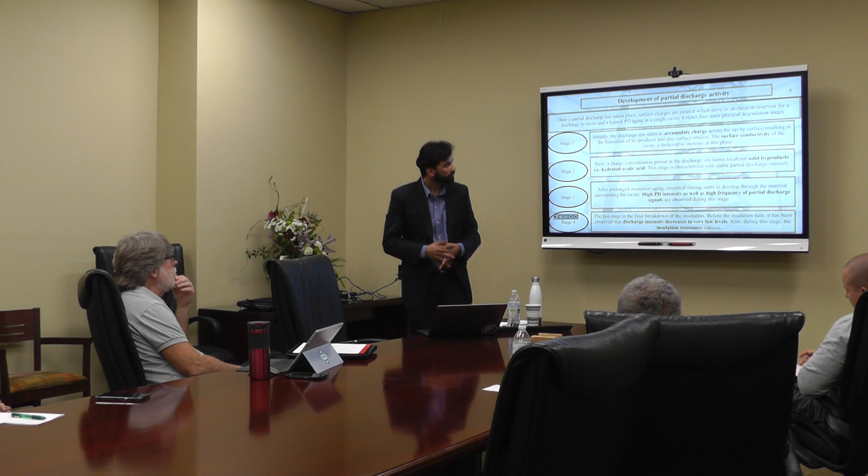During this stage, it has been observed that chemical byproducts are formed due to continuous ionization and ion bombardment. It also results in surface erosion. In addition, it has been observed that the surface conductivity of the whole cavity is increased. That indicates the initiation of the partial discharge activity.

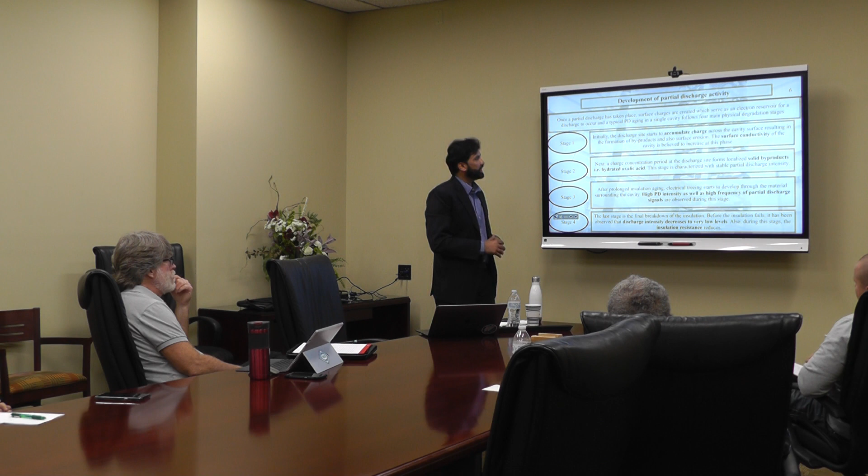The next stage is known as the stabilization period of the partial discharge. During this stage, localized big solid byproducts from the chemical reactions form. As an example, hydrated oxalic acids have been observed. These oxalic acids hinder the flow of charges, and that stabilizes the partial discharge activity. This phenomenon is more predominant in the case of polymeric insulations.

The last stage, which is always the point of interest for researchers, is the final breakdown of the insulation. It has been reported in literature many times that before the insulation fails, the discharge intensity decreases to very, very low levels. Also during this stage, it has been observed that the overall insulation resistance of the cable I am investigating also reduces.

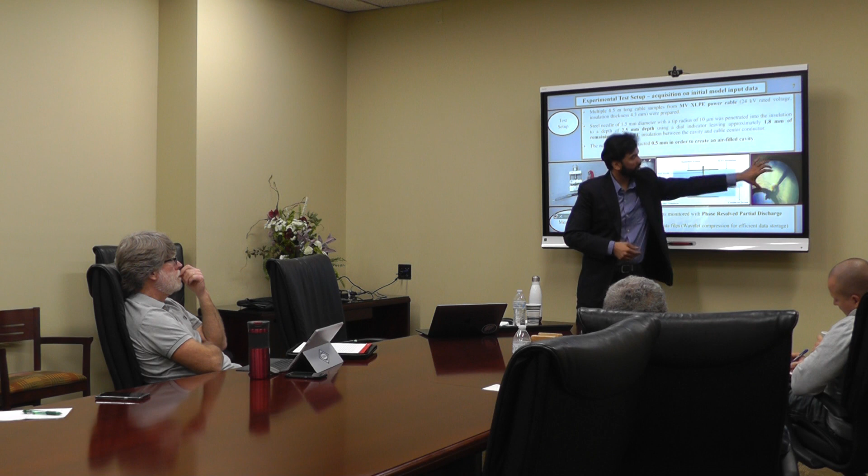This white portion, if you can see, represents the air-filled cavity where the progression of the partial discharge activity happens. I was fortunate enough to observe the progression of the partial discharge happening inside the void. Here is the illustration after the breakdown of the cable sample. I cut it into thin slices of XLPE and observed how the electrical tree phenomenon, represented as stage 3, progressed, which results in the complete breakdown.

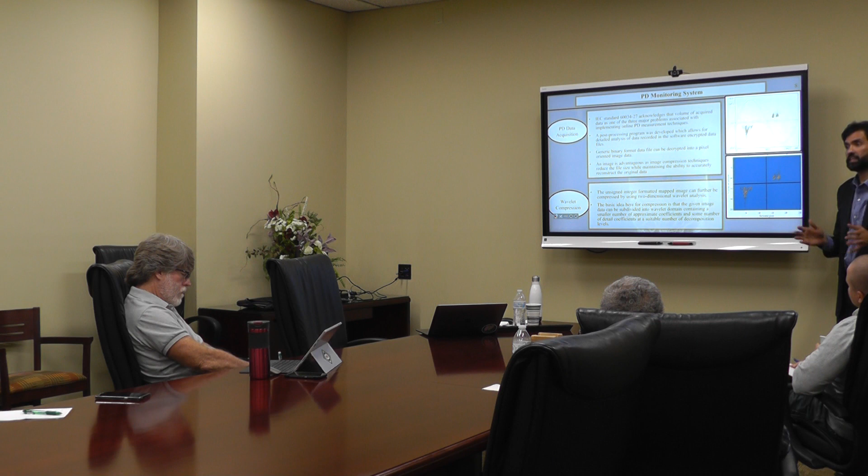Talking about the measurements, I used the technique called phase-resolved partial discharge analysis, which is a very common technique in the field of partial discharge monitoring. Here's a better illustration representing the PRPDA pattern. This is how a commercial PD software or system captures the PD quantities with respect to the AC phase over some definite acquisition period. This example is for 60 seconds of acquired data. Each single dot represents an individual partial discharge quantity.

One of the problems associated with the PRPDA patterns, which actually was acknowledged in the IEC standard 60034, is that the volume of the acquired data is one of the 3 major problems associated with the implementation of online PD measurement techniques. So I came up with a solution on how you can compress the actual data into a smaller file size.

So what I did, I used the generic binary data stored by the commercial PD software and converted it into a pixel-oriented image file. So each pixel represents the intensity of the partial discharge activity happening in that particular pixel. So this figure actually represents the same data, but in the pixel-oriented image data. What's the advantage of using that image? Simple, I can use image compression techniques to store the same data with a reduced file size while maintaining the ability to accurately reconstruct the original data as well.

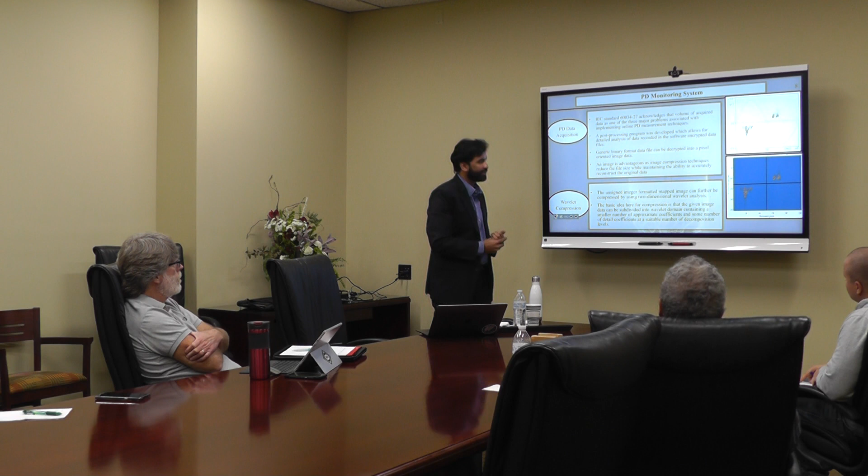Very briefly, I use the wavelet compression technique. It has been used in other branches of science as well. So wavelet compression simply compresses the actual image data by using this technique. Let me illustrate how I achieved the PD data compression. So the same image data, once I decrypted the data, applied the wavelet transformation, the wavelet transformation actually decomposes the original image data into a smaller number of detail coefficients and the approximate coefficients. Those coefficients then can be thresholded and quantized. So the process of thresholding and quantization actually reduces the number of bits required to store the original data.

Finally, just to make it more compressed, I used the deflate compression and the Huffman coding to convert the image data into a single variable. And this is a 100% true compression technique, so you can reproduce the exact image data again. So you can actually make the data storage just based on this technique. So now the question is, if we have to reconstruct the original data, what can we do? Very simple, you can perform all the inverse techniques, for instance, the uncoding, the unquantization, and the inverse of the wavelet transform. Simply, you will produce the original data.

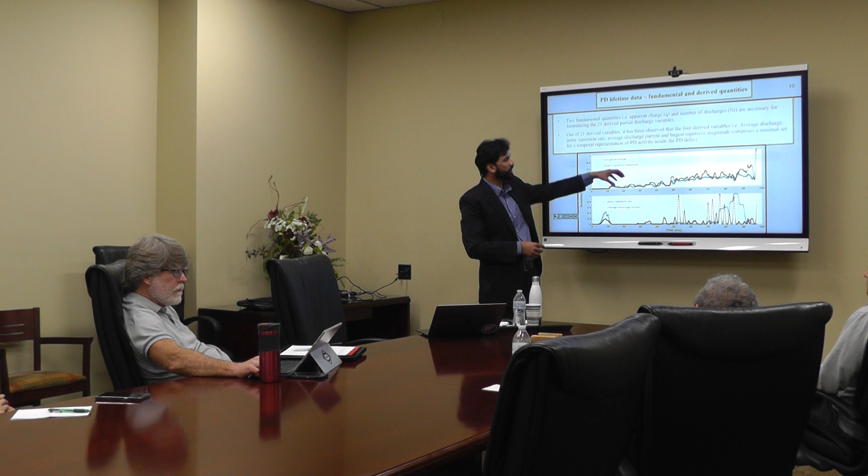Coming to the lifetime partial discharge data. So this is an example from one of my cable samples which I used. So we used accelerated aging. So this cable from start till the breakdown took 96 hours to form the lifetime data. The same four variables which I defined before have been represented. One problem is how we can actually see the codependency among these 4 dependent variables. So in order to answer this question, we go to the data feature or data extraction techniques.

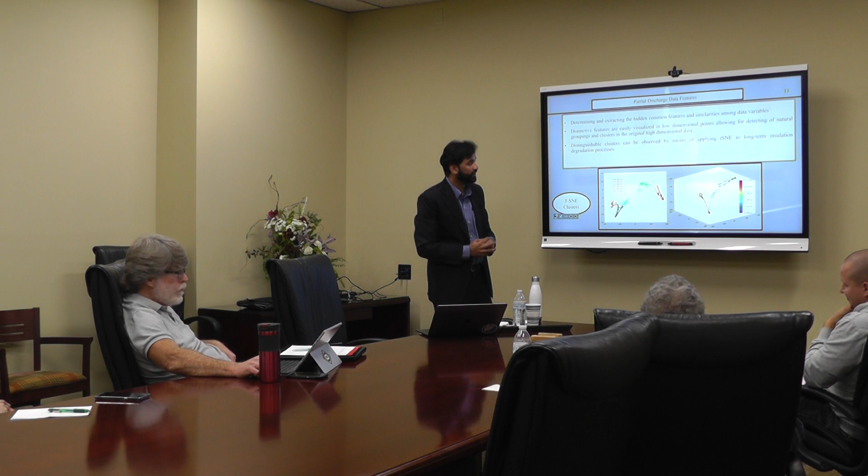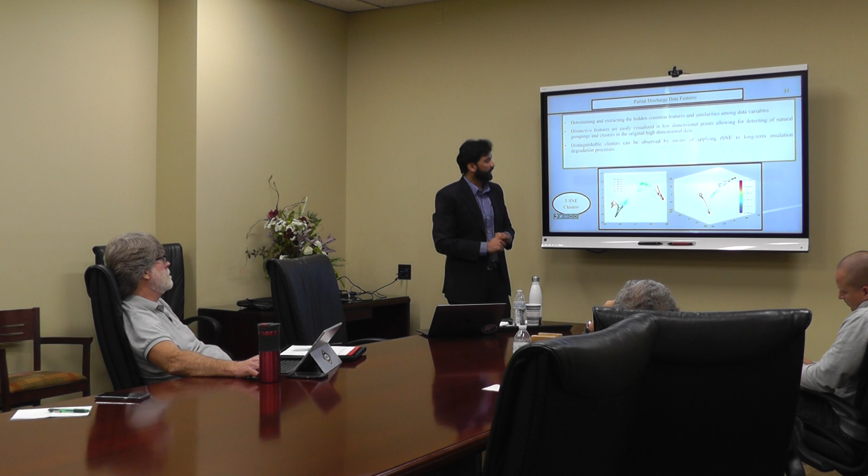One of the techniques, very common, very useful, is known as t-SNE, t-distributed stochastic neighbor embedding. Utilizing this technique actually allows us to find those hidden common features or the hidden similarities among those 4 PD data variables from the last slide. These distinguishable clusters, as you can see from this data plot, in the 2-dimensional scale and the 3-dimensional scale, indicate that there is a distinguishable PD behavior happening over the insulation degradation period. What's the advantage of these distinguishable clusters? One idea is to use those data clusters for the purpose of partial discharge modeling.

So the first point is the time-dependent clusters extracted from the data set of the multiple PD data variables and the observations can establish a definite set of rules and classifiers for a finite set of distinguishable classes. Defining those distinguishable classes actually came from the t-SNE algorithm. So the algorithm actually will suggest how many clusters are required or how many levels of discretization are required in order to obtain these definite distinguishable classes. Another idea behind applying partial discharge modeling is to set up a multi-experimental learning algorithm which actually modifies and corrects its output response based on the newer set of observations. So the more data you have, the more accurate your learning algorithm will be.

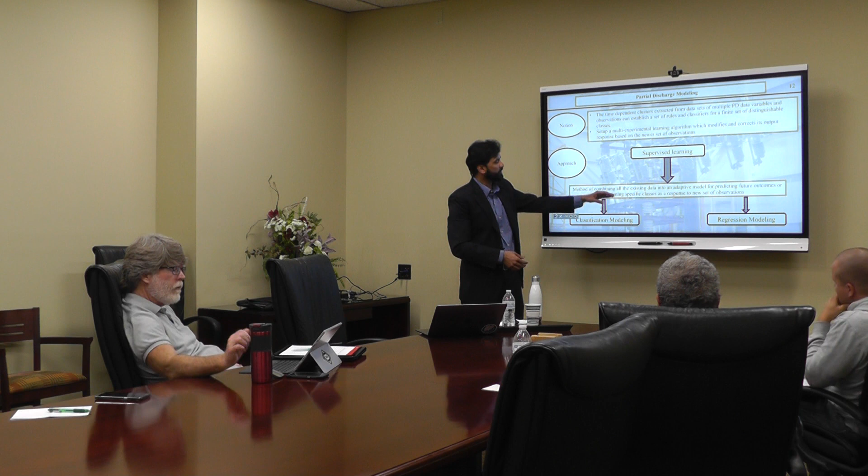A very useful technique in the field of machine learning is supervised learning. So supervised learning is a method of combining all the existing data into an adaptive model for predicting the future outcomes, which represents the regression modeling technique, or assigning specific classes as a response to a newer set of observations. And this particular one represents the classification modeling technique. So both these categories can actually be merged together to perform the supervised learning algorithm.

Talking about the classification modeling or the regression modeling in general. So what are the procedures for performing the classification modeling? Classification actually requires the classifiers to assign each new observation to a specific class extracted from a finite set of classes, as I mentioned before.

Coming to the response of the classification model, the same data which I showed in the previous slides has been represented with 8 distinguishable classes, depending on the interdependence or codependence of all those 4 data variables. How can we judge how accurate the response of the model is? For this, we have to

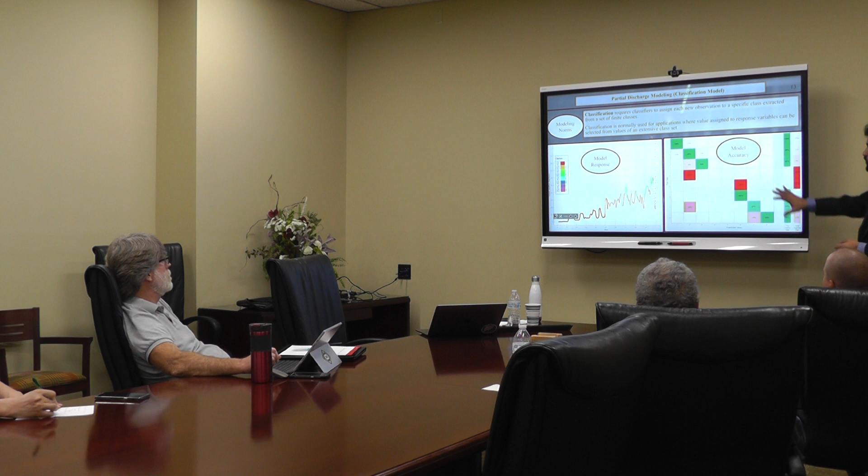find the confusion matrix. The confusion matrix just compares the true class, which is based on the actual data, and the predicted class. As we can see, class numbers 4 and 5 represent a 100% false rate, or false negative rate. That suggests the model fails to assign the class to 100% of the observations which need to lie in these 2 classes.

Similarly, for class number 7, as you can see, 33% of the observations were falsely classified. Similarly, for the last class, 17% of the data observations were inaccurate. So what's the solution? How can we improve the accuracy of the classification of the regression model? One approach which I have used is known as the multi-level time series approach.

So what I did, I divided the whole lifetime data into 3 subdivisions. Why did I do that step? Because these 3 subdivisions are in accordance with the partial discharge mechanisms which I presented earlier. For instance, the first 50% of the degradation time can be classified into one model, and then from 50 to 90% of the degradation time can be represented in a second model, which illustrates the stage

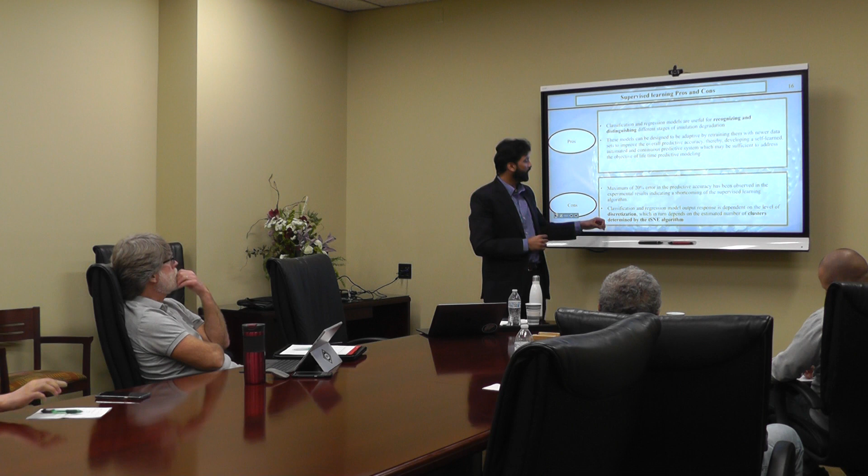The cons, as we see before, a maximum of 20% error has been observed in the other cable samples, which actually indicates the shortcoming of the supervised learning algorithm. Another fact, which in my opinion is the con of this technique, is the dependency of the level of discretization. So the t-SNE algorithm actually dictates how many classes you have to formulate. So one way is you can increase the sensitivity and increase the number of the classes, which will produce very accurate results, but it will not be distinguishable. It will be the same as the actual high-dimensional data.

For my analysis, I used another alternative, multivariate time series analysis. These kinds of analysis have been used for a long time in the field of econometrics, in the field of power system analysis. So I use the same approach for giving the same output response, that is the future prediction, by using this multivariate time series analysis. This technique is independent of the discretization and is independent of the classification. The advantage is that it actually understands the dynamics of the system which is represented by numerous response variables. So it understands how the behavior is actually changing with respect to the time.

Very briefly about the principle. So you have to find a linear combination of those multivariate time series. These linear combinations actually convert each component series into a level of stationarity. Once you obtain this level of stationarity, then you can use the co-integrating relationships, and the coefficients defining those relationships, known as the co-integrating vectors, can be used for the predictive diagnostics. One big con of using this multivariate time series is the unattainability of formulating a multi-experimental learning algorithm, which I suggested before for the supervised learning. So you cannot retrain this multivariate time series with a new set of observations. So it will predict individually for each given sample.

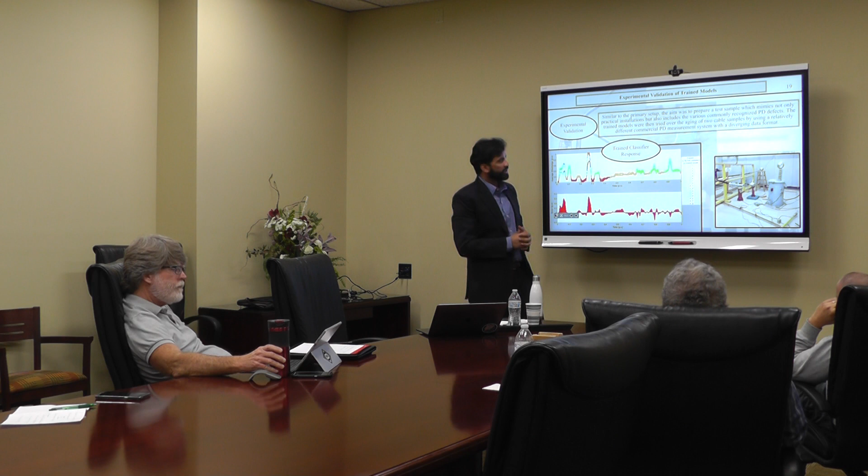Okay, I mentioned at the start of my presentation that we performed another test setup in order to validate all those trained algorithms. So in this case, we tried to observe how these models will behave if we apply a comparatively different type of scenario. So we used a cable sample which was stressed with the lightning impulse voltages and the AC flashover voltages. This cable sample was stressed on the termination end, and I stressed it afterwards with the same configuration, which is the needle plane configuration. So the termination was pre-stressed, and with the artificial aging, I used the steel needle plane configuration as well.

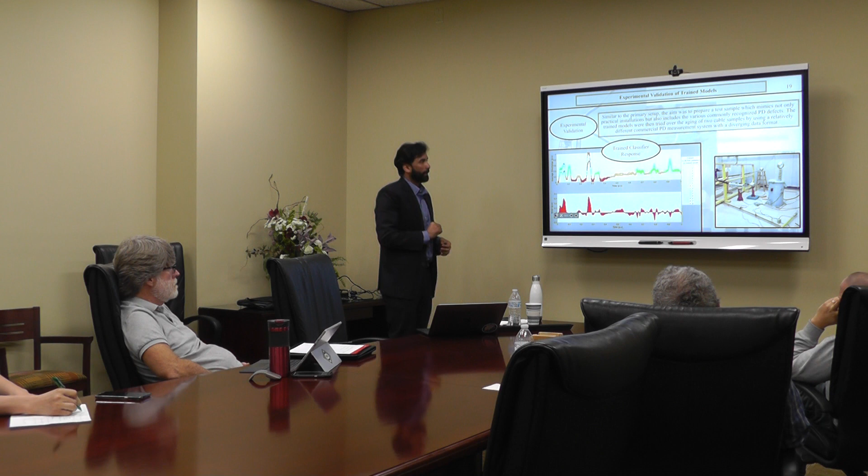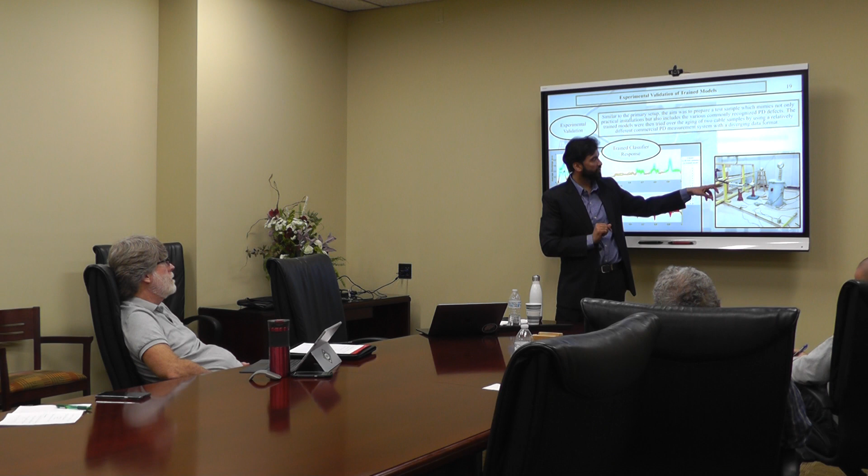In this configuration, I also observed multiple PD defects. Before, it was only the internal discharge of the void. Here, we observed the surface discharge happening across this open end, and also a little bit of corona, which I was able to suppress completely by using the terminating material. Anyhow, coming back to the response of the trained classifier, the response showed 36% inaccuracy between the predicted and the actual response. The advantage is that the model successfully classifies each observation.

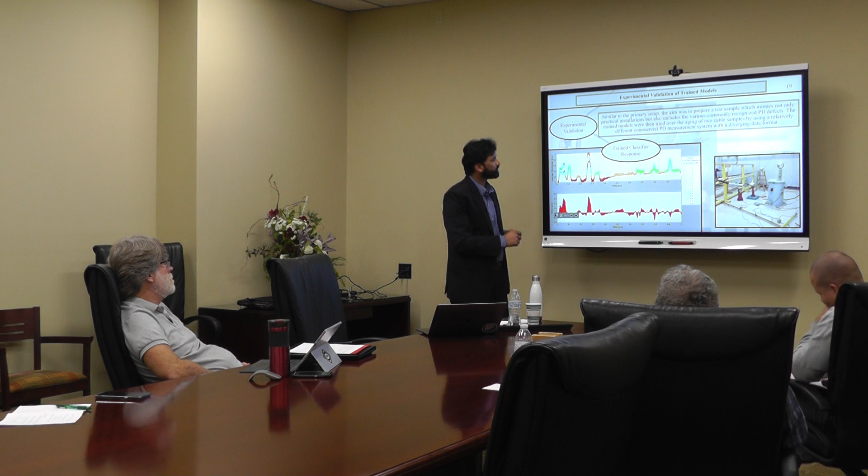Sorry, my bad. So the classification accurately classifies each data observation. So the accuracy was as high as 100%, but for the regression part, the error between the predicted and the true response was as high as 36%, which tells that this model, or the trained model, requires more historical data or requires more learning in future.

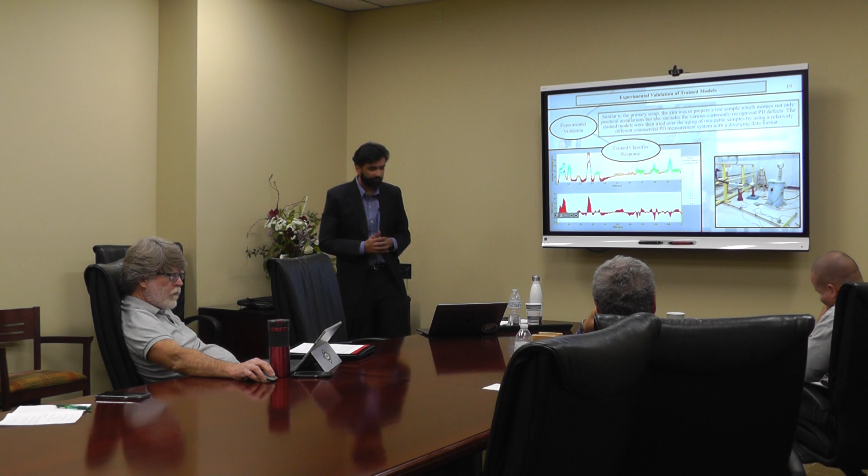Similar observations were made for the VEC model. However, as you can see here, the actual response lies within those percentiles, as well as it was close to the mean of those percentiles as well, which actually suggests that in order to have very accurate predictive response, the VEC model represents a better scenario.

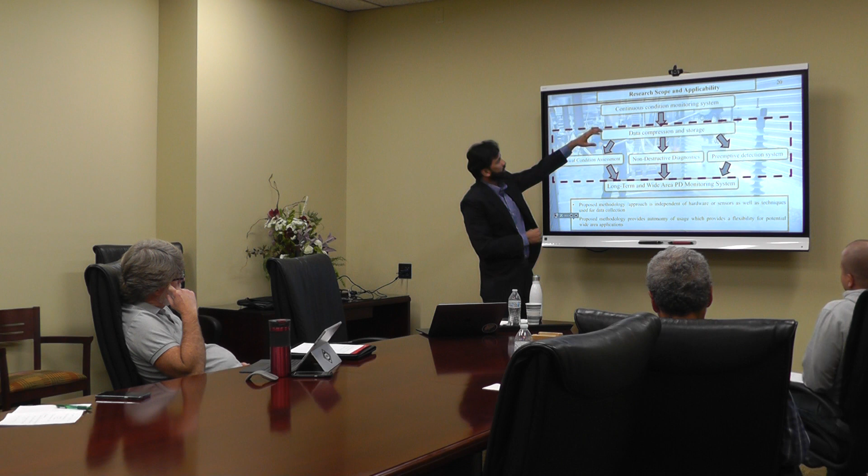Okay, that was all related to what I did in my research and the research methodology. Now let's discuss what is the scope of this research work, where it can be applied. Recently it has been stated that the continuous condition monitoring system has gained significant importance over a traditional periodic-based monitoring system. Irrespective of what kind of sensors or measuring equipment they are using for the condition monitoring system, my research lies within this red area.

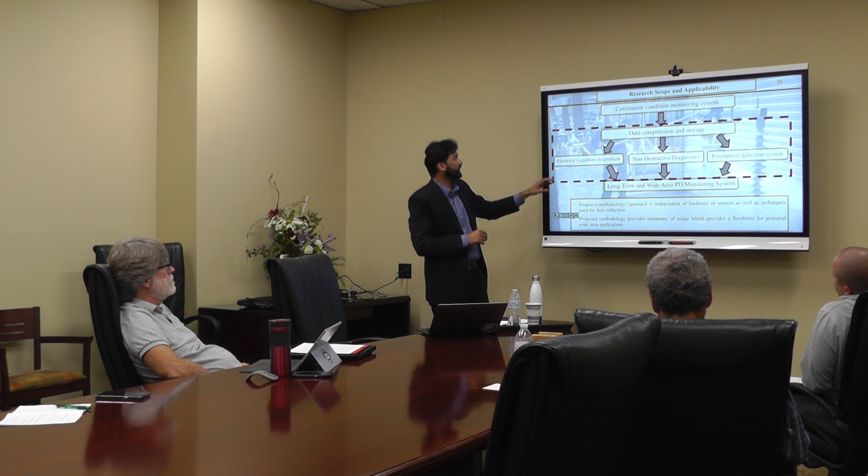First it started with the data compression and the storage technique, which I proposed. Using that compressed and stored PD data, you can use it for the electrical condition assessment in general. You can perform non-destructive diagnostics. You don't have to perform any kind of destruction on the cables, on the sample in general. Very importantly, the last step is the preemptive detection system, which, by using the trained model technique, allows you to set decisive rules, like a decision-making rule, which will allow for preemptive detection.

At the end, where it can be applied. It can be applied for long-term and wide area PD monitoring systems, which is one of the biggest key points in the future smart grid systems.

Talking about the contributions, here's a brief summary of what I did in my dissertation document. First of all, the software-dependent raw PD data was decrypted and exploited by a custom-designed algorithm for formulating different numerical lifetime PD models, as well as for efficient PD data preservation. A heuristic approach resulted in the selection of the minimum PD data variables, which accurately represent the temporal behavior of PD activity.

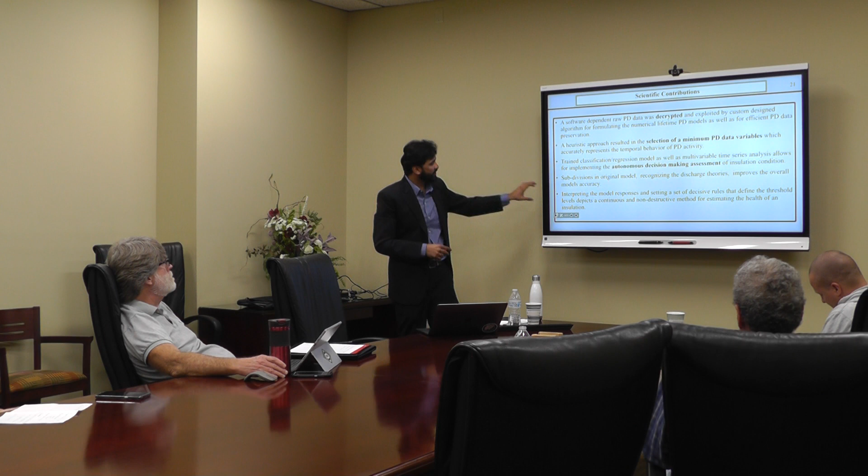As I mentioned earlier, autonomous decision-making assessment can be performed on the insulation condition by using the trained classification and regression analysis. Another big point in my dissertation is that the subdivisions in the original model, which are recognized through the discharge theories, improve the overall model's accuracy. The last point is a key point, where the interpretation of the model responses and setting a set of decisive rules defines the threshold levels, which depicts a continuous and non-destructive method for estimating the health of insulation.

Talking about the future works, I still believe there is a lot to be done in the field of partial discharge monitoring. A lot of investigation has to be done. There is still scope to investigate various scenarios to study the degradation of the polymeric insulation, which will eventually confirm the uniqueness or the universal applicability of the lifetime trends I suggested in my dissertation. The same modeling techniques could be studied for varying insulation materials in the equipment. I used it only for the cable samples, but the same technique can be applied for transformers, switchgear or other kinds of equipment in general.

This point in bold, which I'm in talks with other research colleagues about, and which needs to be performed on a larger scale, is that the laboratory approach should be extended to obtain online data from on-site equipment, which will include the background interferences and the noise, as well as the vast amount of continuous historical PD data. Of course, the majority of that data will be uneventful because partial discharge activity takes a long time to develop.

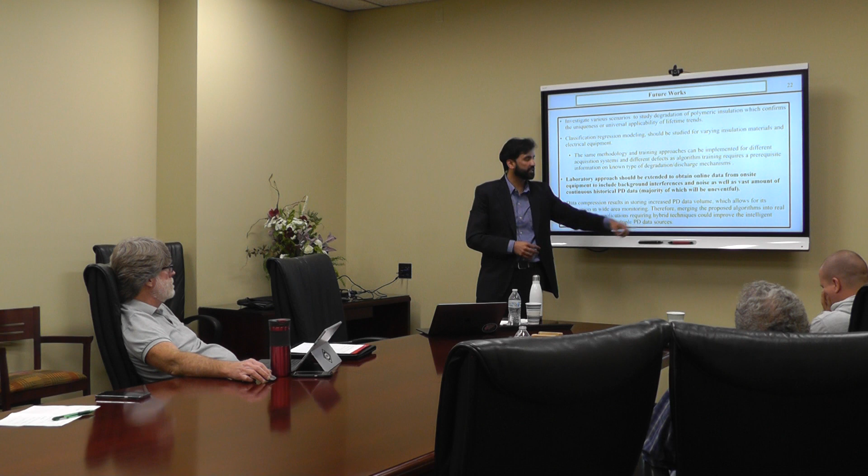The last point is more of an application of my technique. The proposed data compression results in storing increased PD data volume, which will allow for its application in wide area monitoring, as I suggested before. Therefore, merging the proposed algorithms into real-time wide area applications requiring hybrid techniques could improve the overall intelligent expert decision-making for multiple PD data sources. So this is another work which can be performed in future, where my research can be implemented.

I was also involved with the other groups. My professor, my research colleagues, we all have a very big group of partial discharge diagnostics. So we have actually submitted 2 papers as well, which are still under review. Hopefully they will be presented soon as well. There are 4 papers which actually are not related to the partial discharge phenomena, but I was involved in that kind of research as well, all because of the high voltage lab, so we were able to perform this kind of research as well.

That concludes my overall presentation. I appreciate all of you for listening to my dissertation. Thank you, and now I open the platform for the questions and the answers.